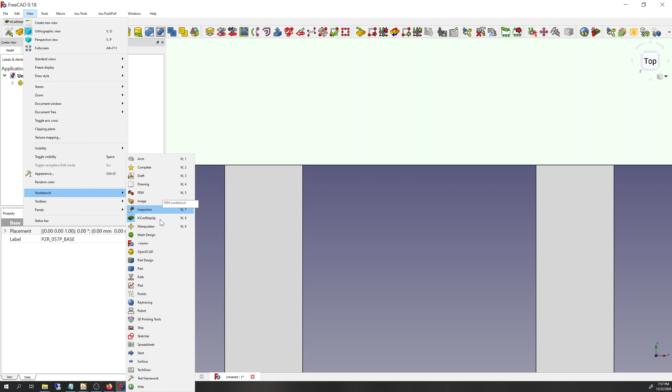Okay, so we got the aligner, and what does it say? This is the first time I've looked at this, so you're gonna have to bear with me. Aligner and mover, Manipulator workbench. Alright, so what do we got? Okay, so we can center stuff.

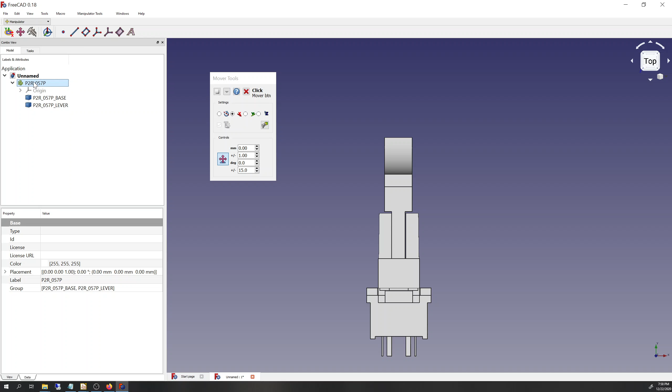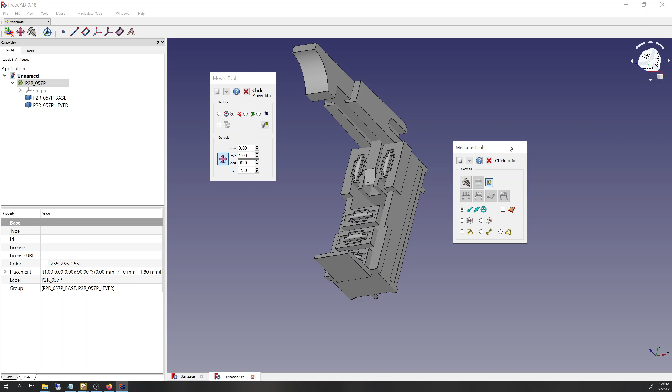Alright, so it looks like we've just managed to rotate it 90 degrees. I have no idea where it's rotated on the x-axis, but I can't see where the origin is. So, datum plane.

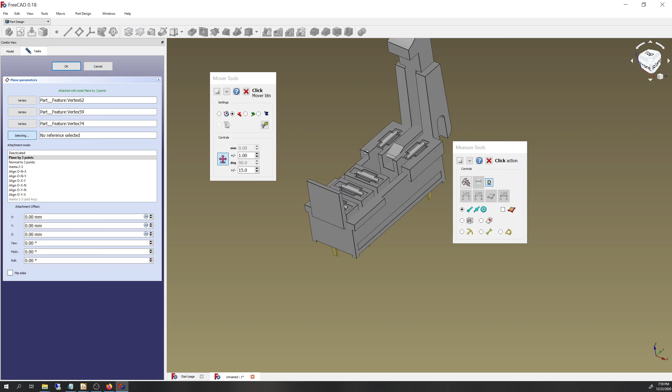Okay, so we can make a datum plane, and finish editing that. Okay, so now we've got a datum plane that's in the right place. So that's good.

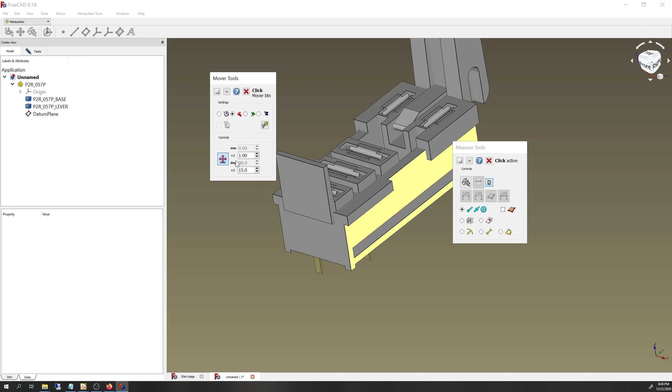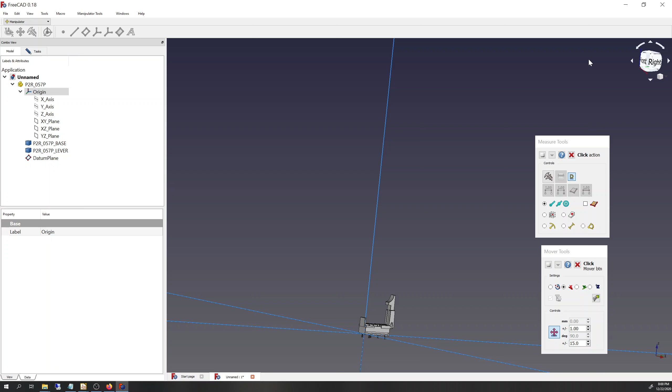Oh, here, we can display the origin. That would be helpful, let's turn that on. Okay, so that looks... So we want the part for sure to be in the X, Y plane. So we want the top to look like the top.

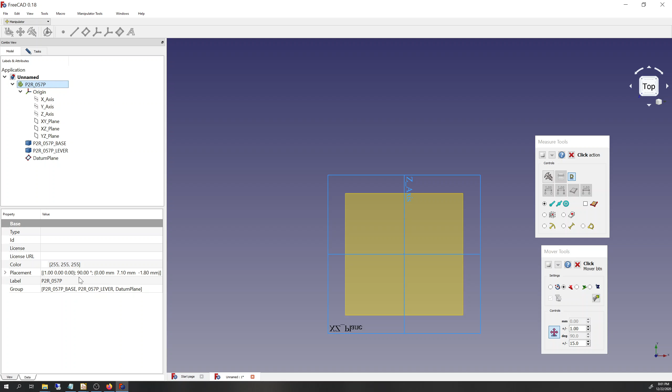God, this is really working great, isn't it? Okay, so the top looks like the top, but somehow we've got, okay, so we've got some rotation here still. So the mover tools seem to just change this placement sort of thing here. So that's fine.

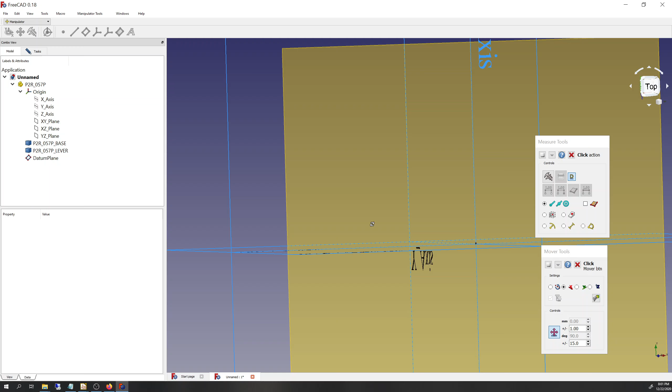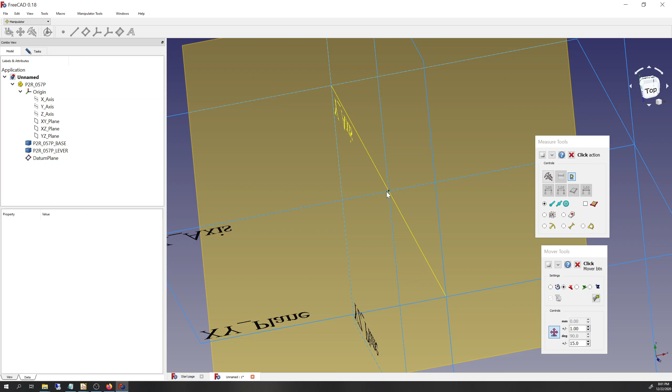Jesus, this is really zoomed, this is almost not usable. Right, let's see if we can get some idea of what's going on here. So the origin is part of this, which is part of what's moved. So the axis labels here and the plane labels here might not be quite right. But let's just see, is there a plane in the right place? This is just not possible to use.

How do we... no. Yeah, I really don't know how to use this, I should say. Let's look at the right side, and then we should see, yeah, so okay, so there is a plane that's right where the PCB should be. Let's carry on, let's try this.

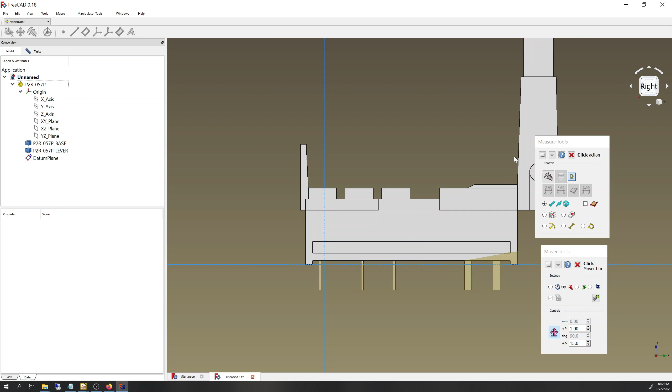So we'll get out of this manipulator thingy and go back into KiCAD StepUp. What are we in the middle of something here? Oh, don't actually need this datum plane, because there is a plane that's in the right spot. Oh, that's what was causing the zooming issues, maybe.

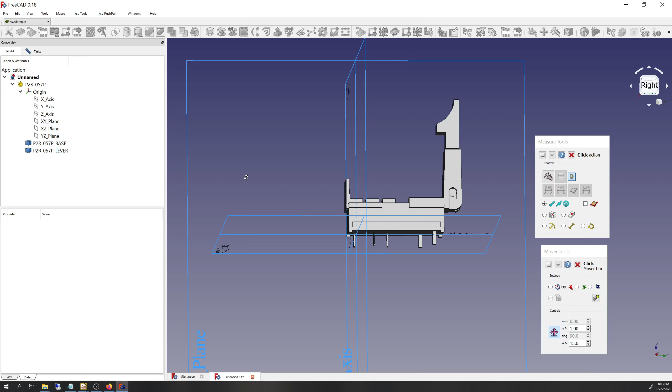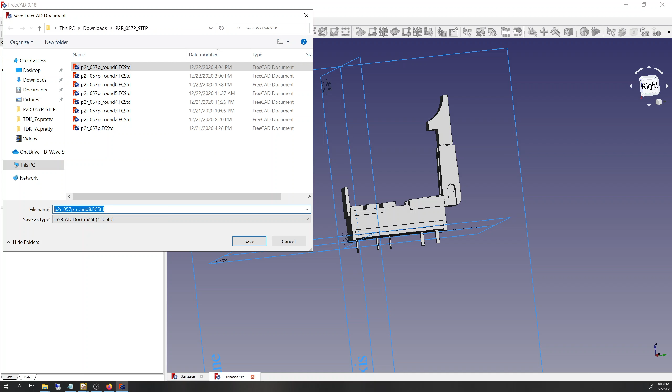Okay, well, here we are. Right, let's close these out, and... why won't you let me do anything? Right, let's try again. Let's just save this and see if we can close and reopen.

Obviously the version of FreeCAD that I'm using, the add-on manager doesn't work, so I had to install that add-on manually, which is really straightforward. You just got to put it in this AppData FreeCAD Mod directory. Download the zip from GitHub and stick it in that directory, and it's all good. Restart FreeCAD when you're there.

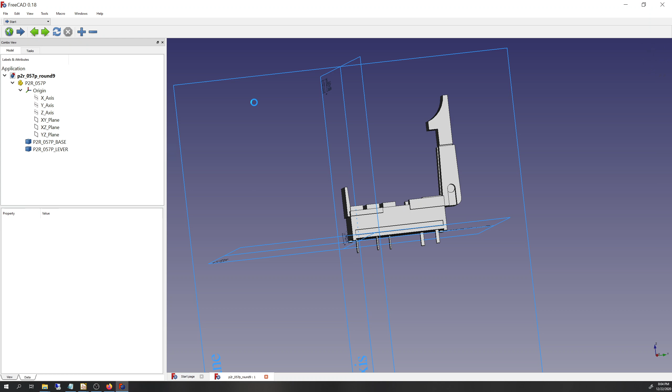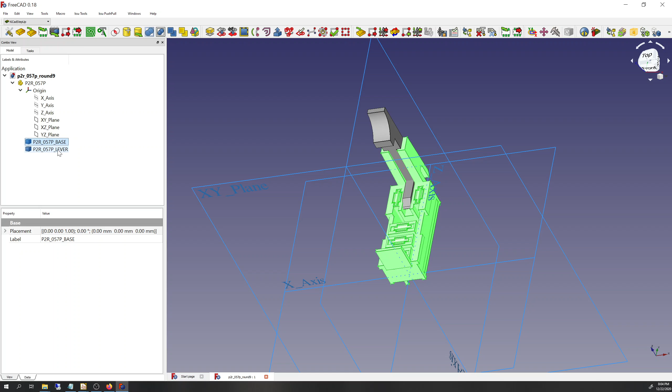Oh yeah, here we are. So we'll go to the KiCAD StepUp workbench, and that's that. And it looks right from the top. So let's make a union of these parts like we did last time.

Okay, and then it ditches the rotation. Alright, well, let's work with that then if we can. So we'll get rid of that and go back to the manipulator workbench.

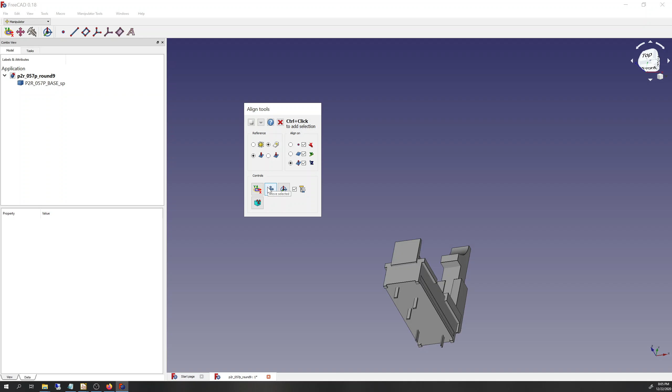And see about rotating it the way that we want to. Right, so let's rotate it about the y-axis through 90 degrees. Alrighty.

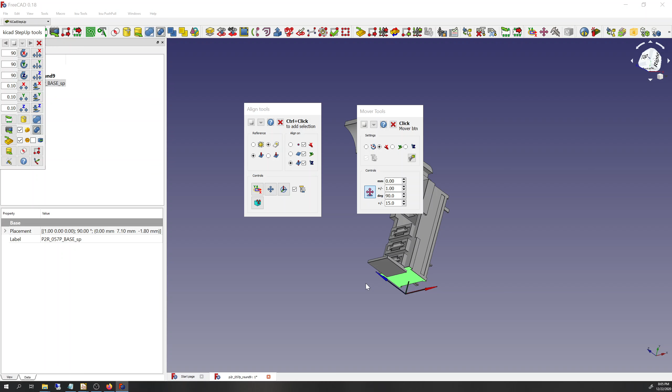And then let's go back to the KiCAD StepUp workbench and let's get the toolbar and show the axes. Okay, and so there's, okay, so it's moved it off the plane that we want. So we're still going to have that same issue, I reckon, even if it keeps the position.

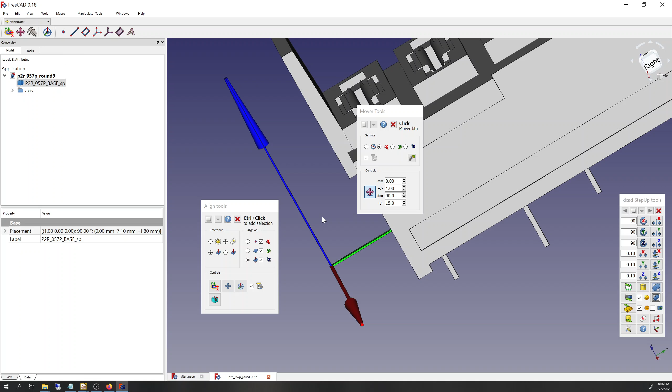Okay, well let's see. Maybe there's, with this workbench, the manipulator workbench, we can move it to a more sensible position then. Let's go back to the manipulator workbench. And yeah, so it's just modifying, like I say, it's just modifying this placement thing here, which I didn't have any success with before.

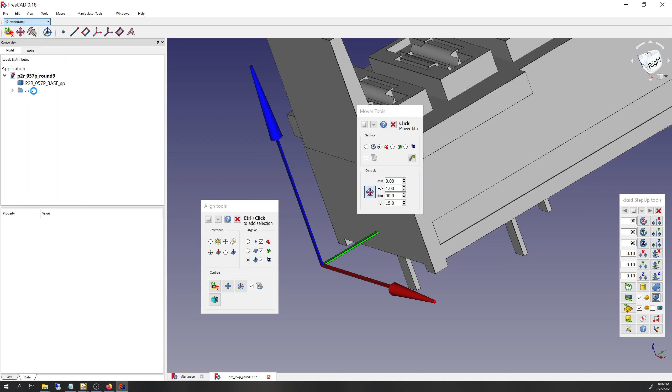Before we do any more with the mover workbench, let's bail out, and see if it holds this position when we convert it to a base feature in the part design workbench, then it's possible maybe that it will work for the future steps. If it resets the position in this workbench when I do this, then it won't work. Yeah, so that's what I figured. So it deletes this placement. It resets this placement when you convert it from whatever this is to a base feature on a part design workbench part.

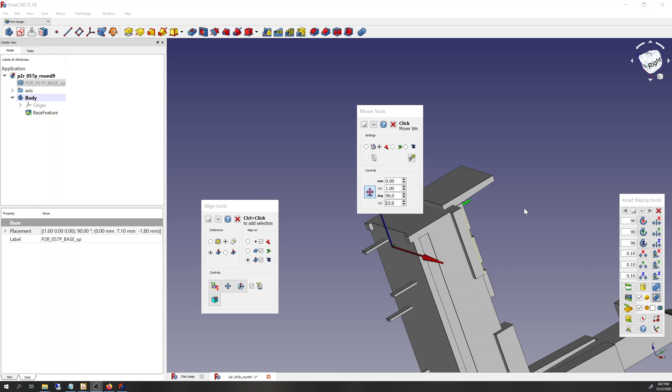So unfortunately, while it looked very hopeful, similar to the draft workbench, it doesn't seem that the manipulator workbench is able to solve this, unless I'm missing something. And for sure, EasyW, if you're out there, I put this on your GitHub as an issue as well. Would be super happy to hear from you about any suggestions that you might have. You certainly know way more about this than me, for sure, more about FreeCAD and a whole lot more about the tools that you've written to make this possible. So also got to give you a shout out and thank you very much for making it even a possibility of this ever working. So yeah, awesome.